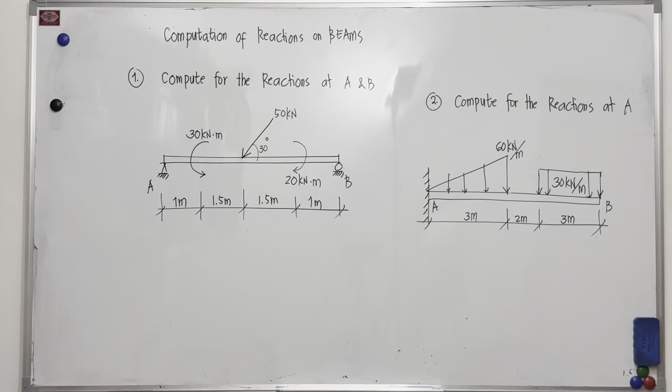Okay, good day. For today's video, we will discuss the computation of reactions on beams.

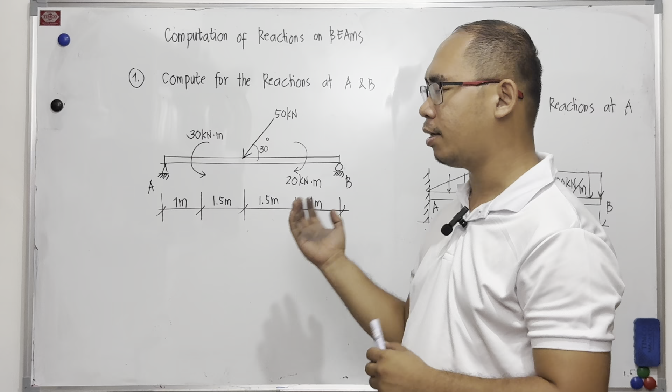For example, problem number 1: compute for the reactions at A and B. We are given a figure showing a simply supported beam - simply supported because it has a hinge and roller at both ends. We also have what we call an overhang, which is the portion hanging on the left or right side beyond the support.

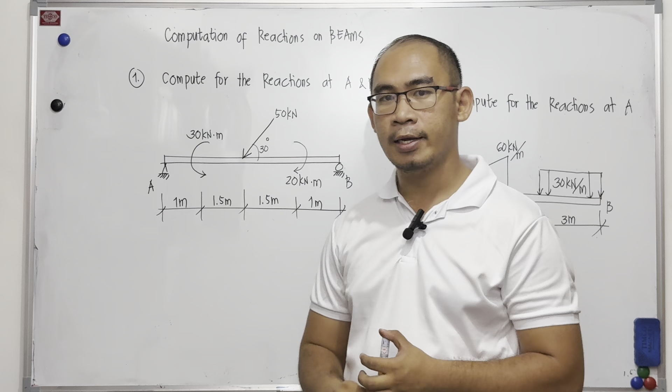So for this problem, when we compute the reactions, we need to remember how many support reactions we have. For example, with a hinge, we know there are two support reactions. Let's say this is point A - we have AY and AX. That's for a hinge support.

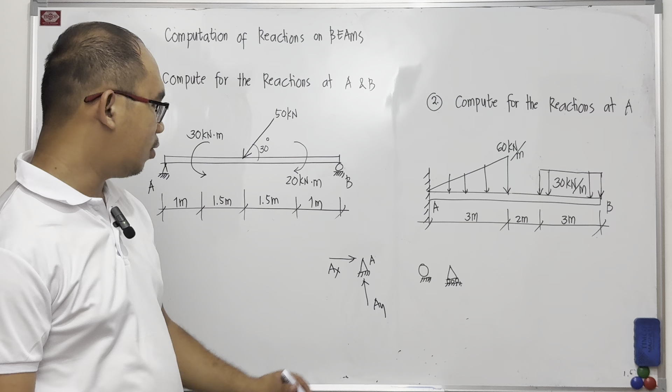Then for a roller support, we have this type of support. Sometimes in books, the roller is drawn like this - a circle shape, which also means roller. The support reaction for that, if this is point B, is BY. That BY is the same as the total reaction at B, since that represents the total force.

Unlike the hinge, where the total reaction is RA. From statics, we can formulate a triangle - tip to tail, AX then AY, giving us the reaction at A. By the Pythagorean theorem, the reaction at A equals the square root of AX squared plus AY squared.

Then we also have a fixed support, which has three reactions: a horizontal component, so let's say this is point C - we have CX, CY, and the moment at C.

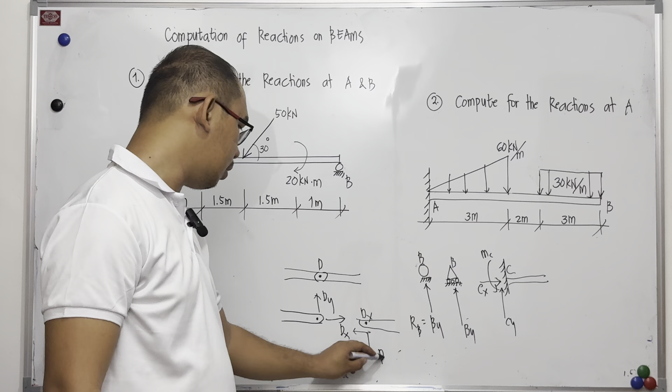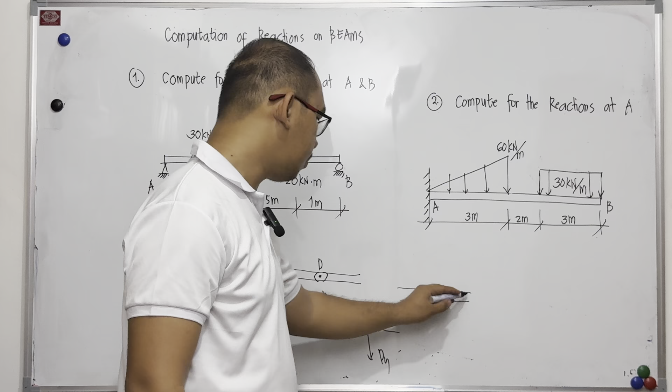Then, just as we have an external roller, we also have an internal roller, like this one - it's rollered here. So we have the force in that member. Let's say another point E - the reaction at E, or EY. That acts upward there if we consider the two portions, the first and second portion. So that is RE equals EY.

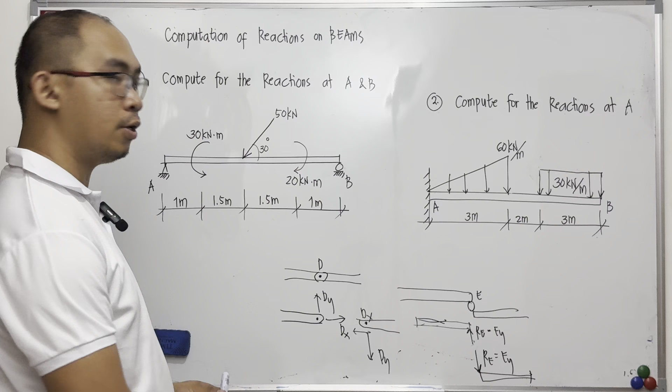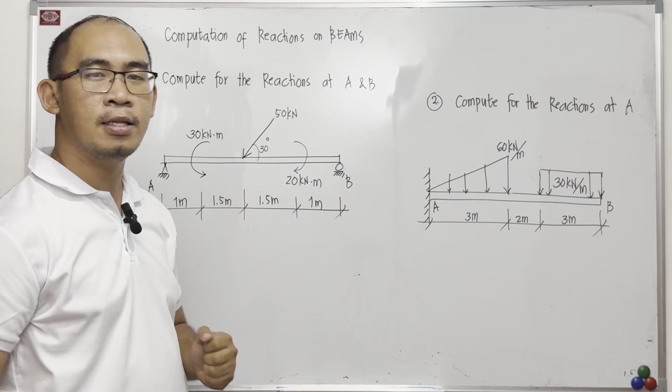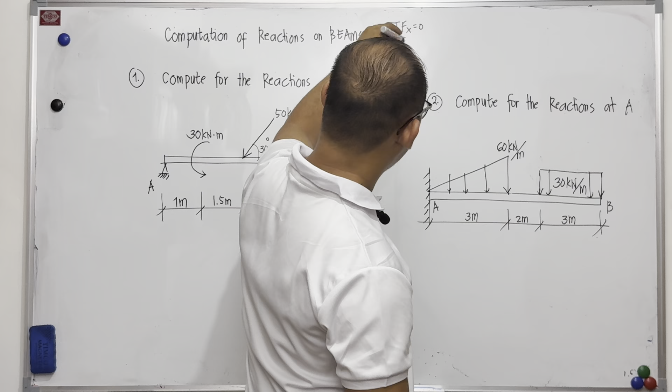So for this problem, let's compute the reactions. This given beam is statically determinate. Since we say it's statically determinate, it can be computed using what we call the equilibrium equations: summation of forces in x equals 0, forces in y, and summation of moment. That's our equilibrium equation.

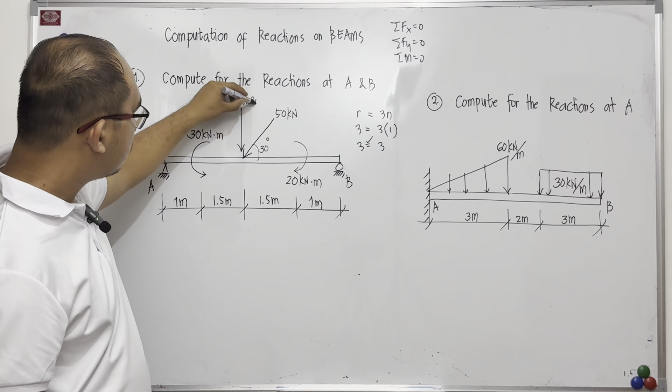From statics of rigid bodies, this 50 kilonewton can be resolved into x and y components - so this is 50 sine of 30. If that's along the x-axis, the vertical component is 50 sine 30, and this one is 50 cosine of 30. Then we also have a 20 kilonewton meter couple.

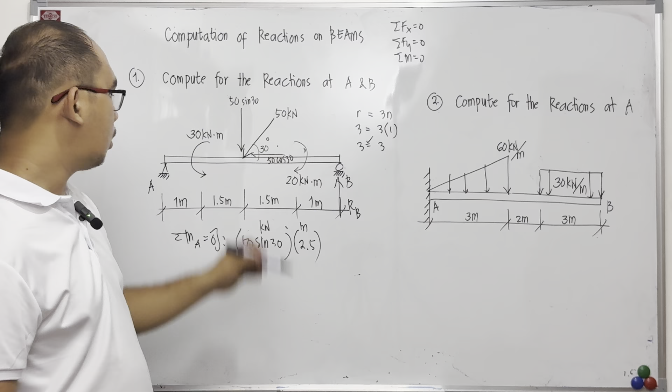Okay, so meron tayong unit couple dyan na 20. So yung 20 na yan, assumption positive natin dito is clockwise. Dahil clockwise yung 50 sine 30, positive to. So yung 20 naman po ay clockwise din. So ipa-plus lang po natin yung 20.

Tapos meron tayong na-encounter na counterclockwise naman na 30 kilonewton. Minus naman po natin yan. Kakailanganin pa po bang i-multiply siya sa distance? Hindi na, kasi ang unit na nito ay kilonewton meter. At ito ay kilonewton meter na rin. So wala na pong kailangang i-multiply na distance pa.

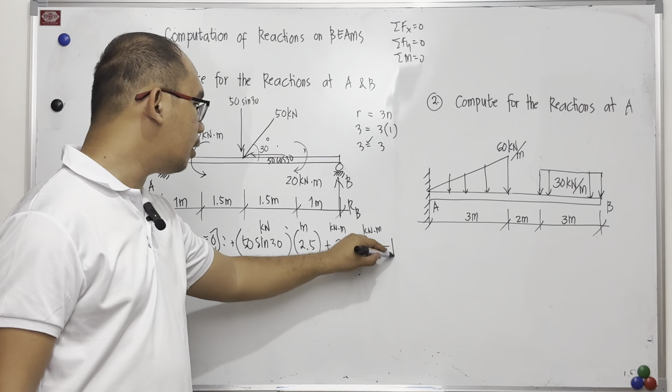So minus yung ating RB, multiply by, ilan po yung distance nito? 1.5, 1.5, 3 plus 1 plus 1. So that is 5.

So to compute for the reactions ng ating equals 0. I forgot to write equals 0. So 50 sine 30 times 2.5 plus 20 minus 30 over 5. So that is 10.5. So reaction sa B is 10.5 kilonewton.

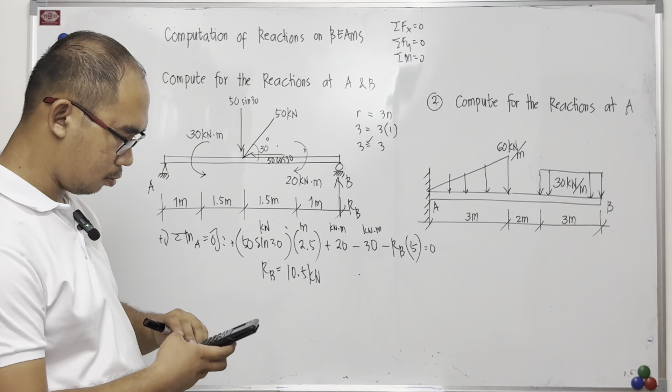Okay, so 10.5. So ito pong RB na yan, that is also BY. At yan na rin po yung total reaction sa B since wala naman po yung X component. So for the reactions of A naman, meron po tayo ditong AY at meron rin tayo ditong AX.

So kung meron tayong AY at meron tayong AX, kailangan po masolve muna natin yung AX bago yung AY. Not necessarily, I mean, pala, na AX mauna. Kahit AY, okay lang. Pero kailangan makompute rin natin yung AX.

So kung kailangan nating mag-solve ng AX, so ito ay direction, assume direction lang yan, no? So kung negative man po yung magiging value niya, so sige, gawin natin na ang direction nito ay pakaliwa. Pero I expect na magne-negative yung sagot since meron tayo ditong inclined force na ganyan. So to the right siya, to the left.

So dapat magre-react to ng to the right. So kung magsa-summation para ma-solve yung AX, kailangan mag-summation of forces naman tayo along x is equal to 0. Assumption positive is to the right, so that is negative AX minus 50 cosine 30 is equal to 0. So yung lalabas pong value ng AX dito is negative. So that is negative 50 cosine of 30. Negative.

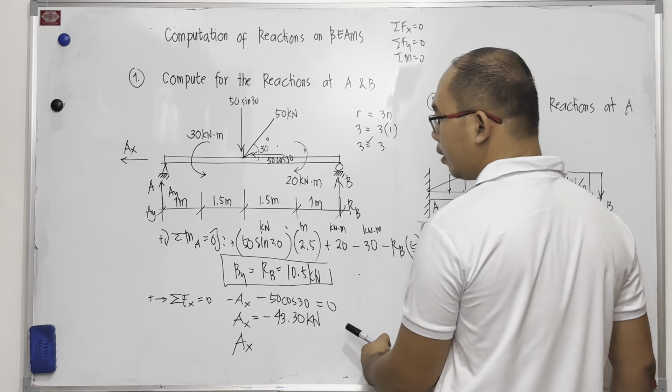43.30 kilonewton. Okay? So yung negative na yan, it indicates na yung in-assume nating direction ay mali. So tatanggalin ko na lang tong negative. So AX is, ito ay, nung in-assume natin na siya ay to the left. So AX is 43.30 kilonewton and it should be to the right na.

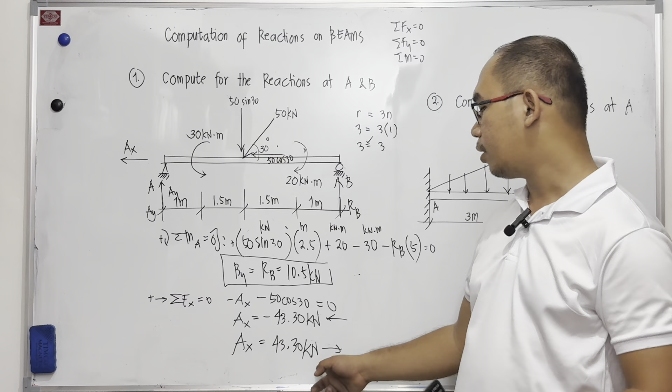Okay, so kung ang tinatanong ay reactions or total reactions, hindi yan yung sagot. Pero kung ang tinatanong ay horizontal component of the reaction at A, ito na po yung sagot, no? So kung total reactions ang tinatanong, hindi pa yan yung sagot. At kung reactions lang ang binanggit sa problem, assume na total ang tinutukoy dyan, no?

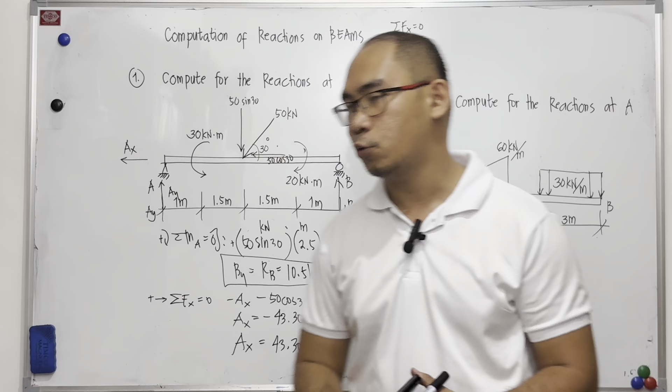So para naman po ma-solve yung ating AY, dalawa po yung paraan. Pwede tayong mag-summation of forces, tapos summation of moment. So doon na lang po ako sa mas madali. Summation of forces y is equal to 0. So kung gusto nyong explore pa, pwede kayong mag-summation ng moment. Then dapat magsi-0 pa rin siya.

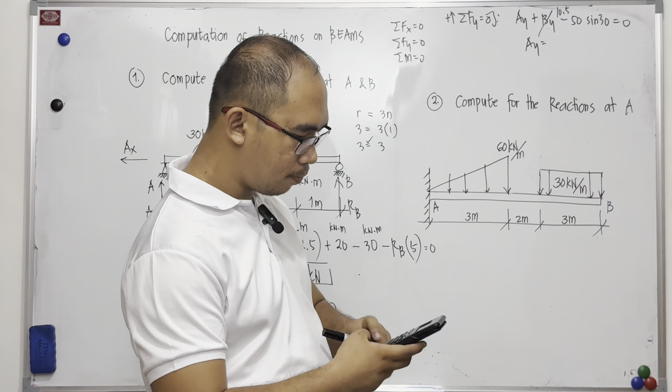Okay, so AY plus BY or RB, assumption positive upward. So minus 50 sine 30 is equal to 0. So may na-solve na tayong BY kanina, 10.5. So ang ating magiging value ng AY is equal to 50 sine 30 minus 10.5. 14.5 na. So 14.5 kilonewton.

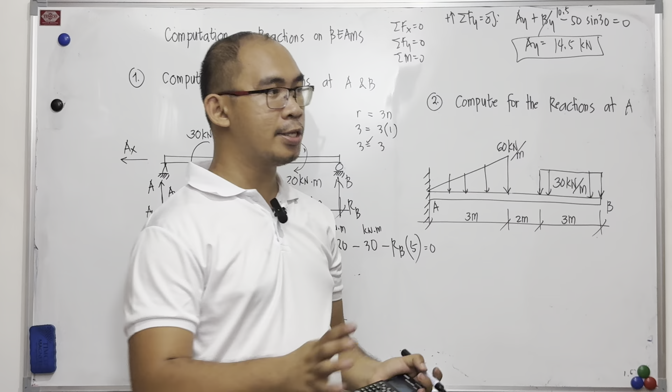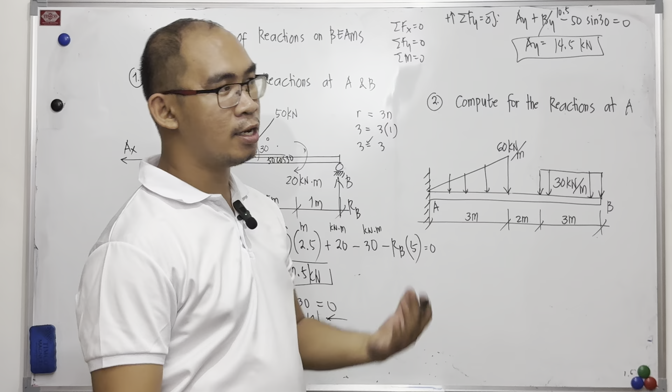Okay. So ang kagandahan kasi dito sa topic na to, pwede kayong mag-checking ng isang equilibrium equations na hindi nyo pa nagagamit. Kung nag-moment ka sa A, pwede kang mag-moment sa B. No? Sabi ko kanina, try it on your own, pero sige, let's try to compute na rin.

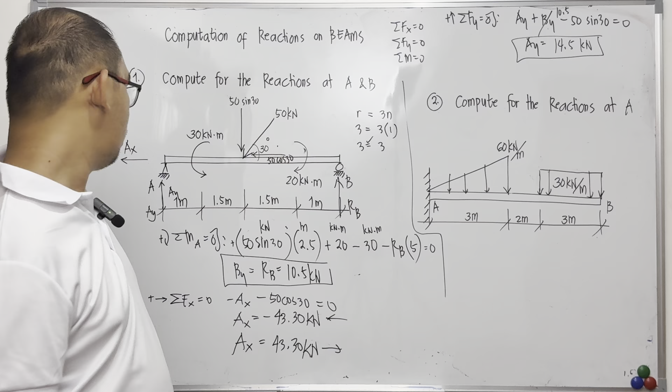Pero buburahin ko mamaya yung solution, no? Para meron tayong space mamaya dito sa next problem. So kung kunwari hindi mo pa alam yung AY at medyo duda ka, pwede ka namang mag-summation ng moment sa B. So summation ng moment sa B is equal to 0. Sige nga,

AY times 5. Tapos meron tayong minus 50 sine 30. Distance nito, perpendicular is 1.5 plus 1. So that is 2.5. Tapos, again, ano ba yung assumption positive natin dito? Assumption positive dito is clockwise.

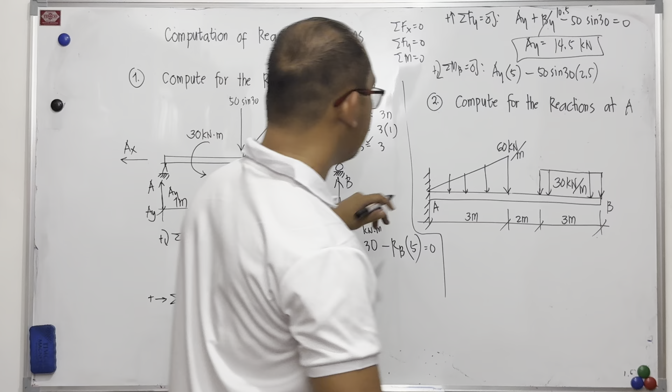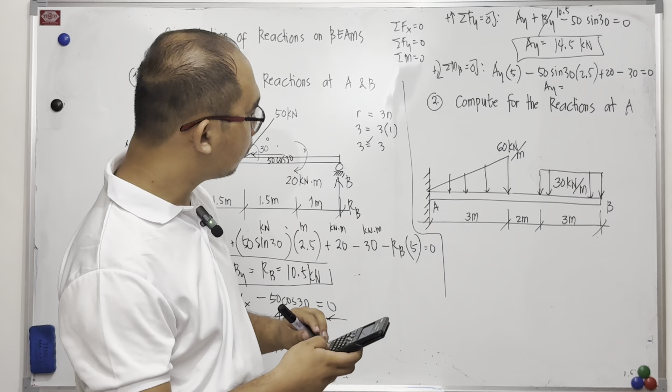Okay, so clockwise direction. So AY times 5 minus 50. Tapos, ano pa yung clockwise? Itong 20 clockwise. So plus 20. Tapos minus 30 is equal to 0. So dito may mapapalabas tayong value ng AY. So that is 10 plus 50 sine of 30 times 2.5 divided by 5. So 14.5.

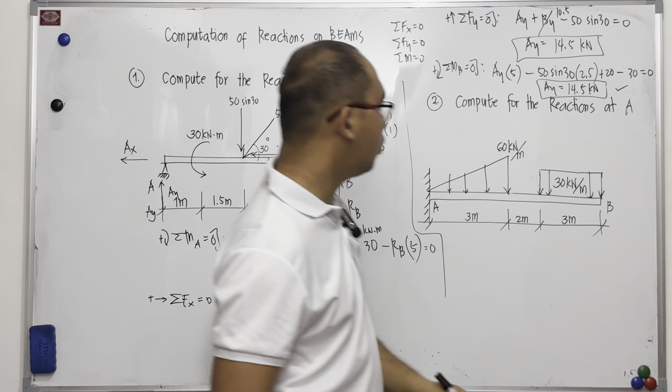So ito po yung kagandahan ng pagka pwede nyo ring i-check na tama yung 14.5 dun sa isang equilibrium equations na hindi pa natin nagagamit. So dapat paparehas po yan, no?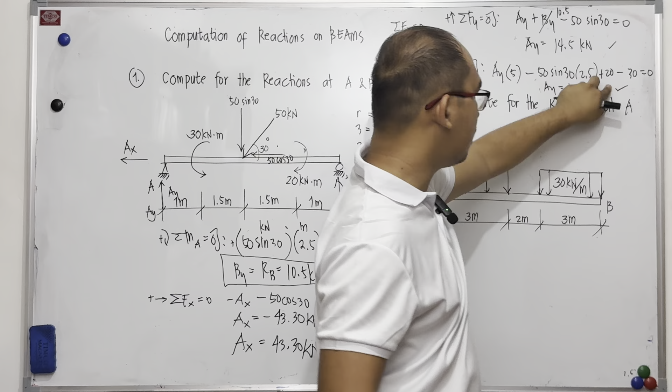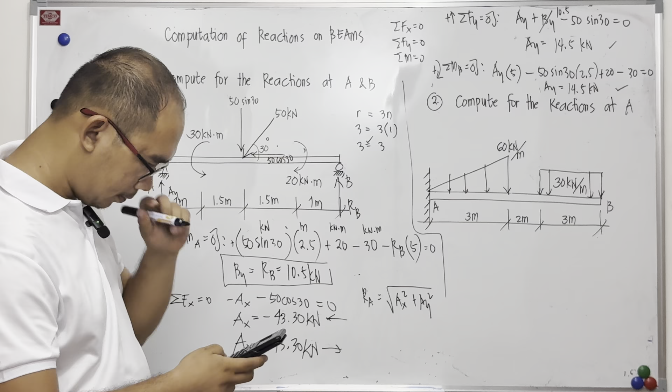And for the reactions at A, kung component lang yung tinatanong yan na yung sagot, no? Assume natin na sa problem na yan, ang tinatanong ay total reaction sa A. So kung total reaction sa A ang hinahanap, that is just equal to the square root of AX squared plus AY squared. So computein lang natin, no? So that is 45.66 kilonewton. Ito na po yung sagot, no?

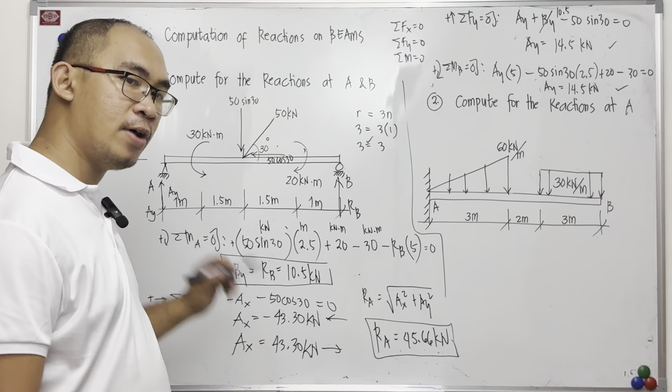Okay. So kung total reactions, ito na po yung sagot, no? I-box natin yung final answer kung yun yung tingin nating tinatanong doon sa problem.

Okay. So for the next problem, this is what we call the type of beam na cantilever beam. Cantilever siya kasi meron siyang isang support lang dito tapos lahat ay all throughout ng span ay overhang na, no? So kung maalala natin, meron tayo ditong vertical AY, meron tayong AX, tapos meron tayong moment.